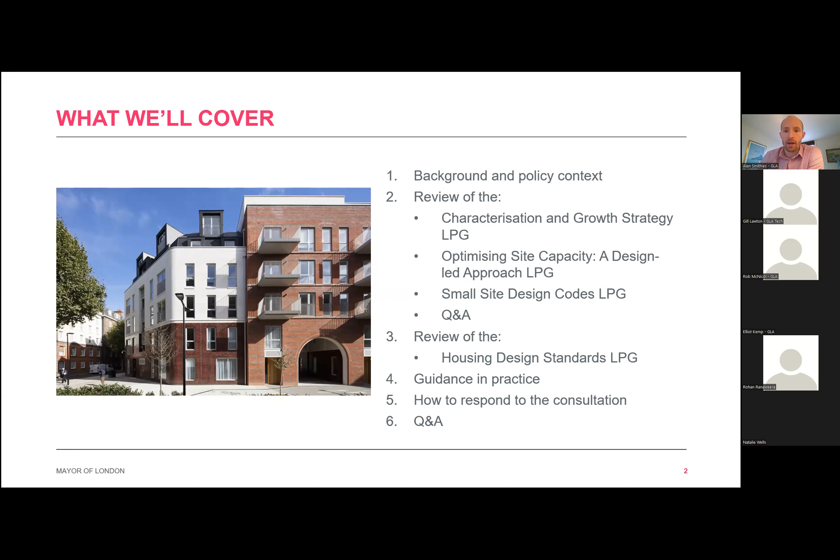A bit of background to the guidance we're consulting on. The first draft was called Good Quality Homes for All Londoners, released for information only in March 2020. Following this, the guidance was consulted on as London Plan guidance between the 13th of October 2020 and the 15th of January 2021, so for 13 weeks. The guidance consisted of 4 modules, shown at the top: module A, B, C, and D.

Since this public consultation, the guidance documents have been significantly revised. The changes are in response to the consultation feedback we got, but also to new national policy and guidance, such as the publication of the National Model Design Code and the changes to the NPPF, as well as responding to changes brought about by the COVID-19 pandemic. The previous draft guidance was also written in a style that doesn't reflect how our new guidance is done these days, because we've reconsidered how we do our London Plan guidance, and we want to make it as succinct as possible and much clearer. Hopefully that is the case.

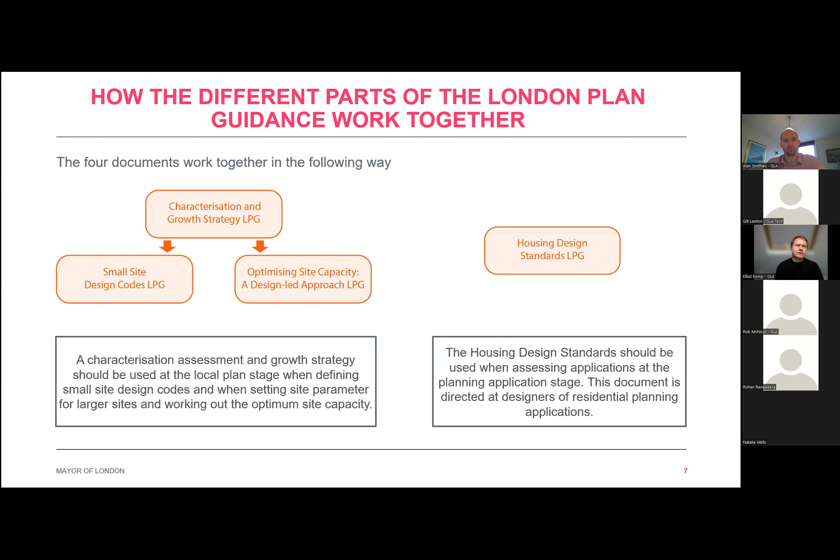The housing standards should be used when designing and assessing housing developments at the planning application stage. So it's not really aimed at the plan-making stage at all - that's quite different from the other 3 documents. This document is particularly aimed at designers of residential development. So Alan will now cover the first 3 documents.

Great, thank you so much, Elliot.

Okay, so on to Characterization and Growth Strategy LPG. Firstly, what is characterization and a growth strategy? This is the process of undertaking a characterization assessment or study and then devising a growth strategy for that area. This process should aim to identify what is special and unique about a particular area and form the basis of how the area might change over time. It's intended to be carried out, like Elliot said, by a borough or neighbourhood planning group, and is broken down into 3 stages, which I'll go on to in the next slides.

One important aspect to mention is that the approach taken in this process should be a digital approach to data collection and mapping. As a result, this should be much less about producing PDFs and much more about web-based maps wherever possible.

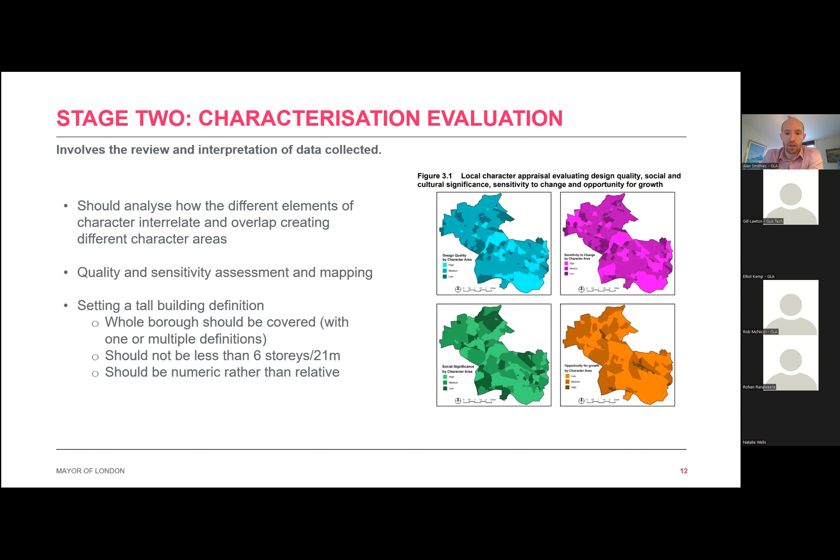The whole borough should be covered by one or multiple definitions, and this definition should also not be less than 6 stories or 21 meters to the top of the building, and should be numeric rather than a relative definition.

Stage 3 is where the borough or neighbourhood planning group should identify how and where the area will change over time. This involves a series of design, visioning, placemaking exercises to identify the following for each character area: first, areas suitable for different levels of change and growth.

The second is area-wide vision, policies, and potentially area-wide design codes for these different areas. And thirdly, locations where tall buildings may be an appropriate form of development.

Fundamental to this process is the involvement of and engagement with local communities. At this stage, it's a separate set of engagement than in stage 1, and should be focused on how and where to accommodate that change.

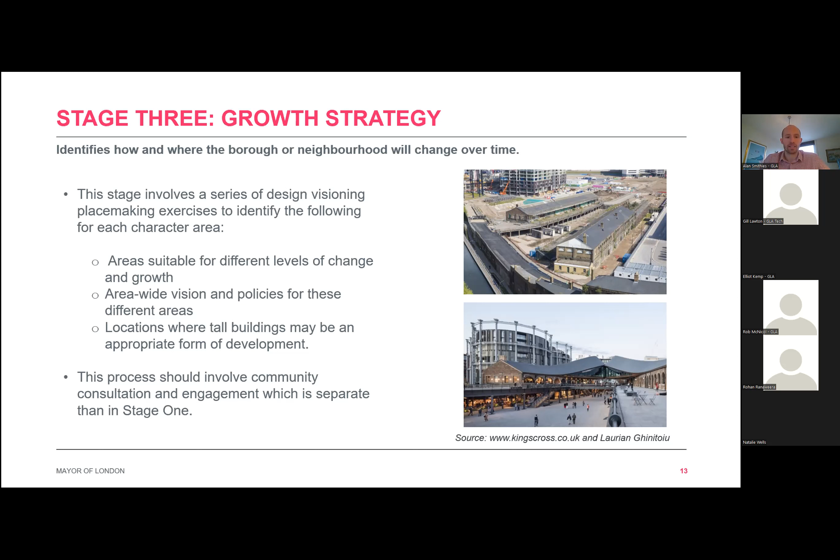In addition to that, their capacity for growth should be assessed. This capacity for growth relates to the opportunity for growth criteria I mentioned earlier, and is influenced by things like the connectivity, the built form of an area, among other aspects.

Important to mention at this stage is that this categorization is intended to be a tool rather than a designation.

Having identified an area's level of change and growth, an area-wide vision should be formulated, and a set of policies or parameters should be defined and determined for each of these character areas. These should set the broad parameters of how an area will change, and how its strategic

design intentions and aspirations - I've got a picture on the slide showing an area that's undergone substantial change, where you can see that the character's been significantly improved, just as an example there.

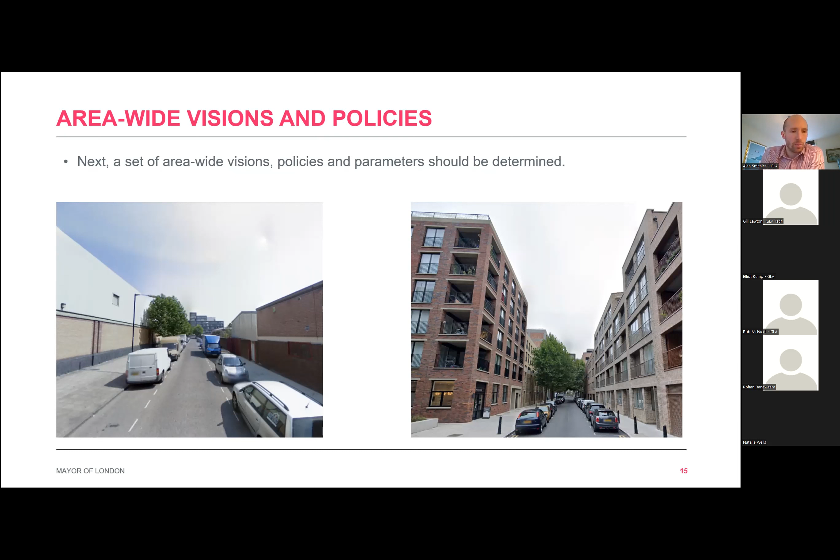I think in reality, much of this work is already being done or being commenced for different areas within a borough or neighborhood. However, we mention it in this guidance as an important part of a growth strategy.

The last bit I'm going to cover is the identification of locations where tall buildings may be an appropriate form of development. This should be a sieving exercise broken into 4 steps: a sensitivity assessment, alignment with area-wide vision, a suitability scoping exercise, and then lastly to define the maximum heights for areas where tall buildings may be appropriate.

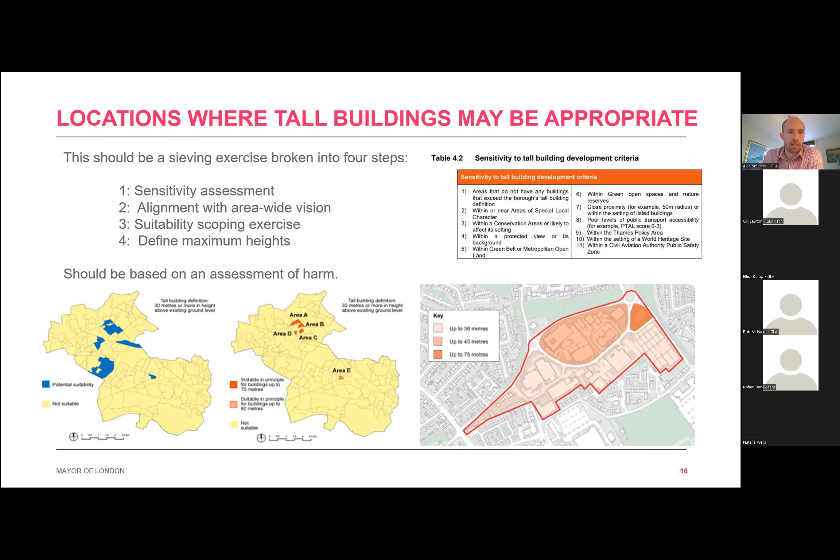I've shown a few images there on the screen about those processes. This process as a whole should be based on an assessment of harm, and local authorities are encouraged to set out the harm caused by tall buildings in locations where they are not appropriate.

So that is a quick run through of the characterization and growth strategies LPG. I'm next going to look and review the optimizing site capacity, a design-led approach, LPG.

The document sets out that development should optimize site capacity rather than maximize density. The process involves setting site-specific design parameters and codes to provide clarity over the future design of sites. These are high-level strategic parameters addressing the form, massing, and layout of a future development. By strategic, we mean the most important design considerations rather than detailed design aspects.

For residential sites, these parameters can then be used to determine a site's capacity using the indicative site capacity toolkit, which is part of the guidance. This toolkit allows users to model the massing of a development using 3D SketchUp models.

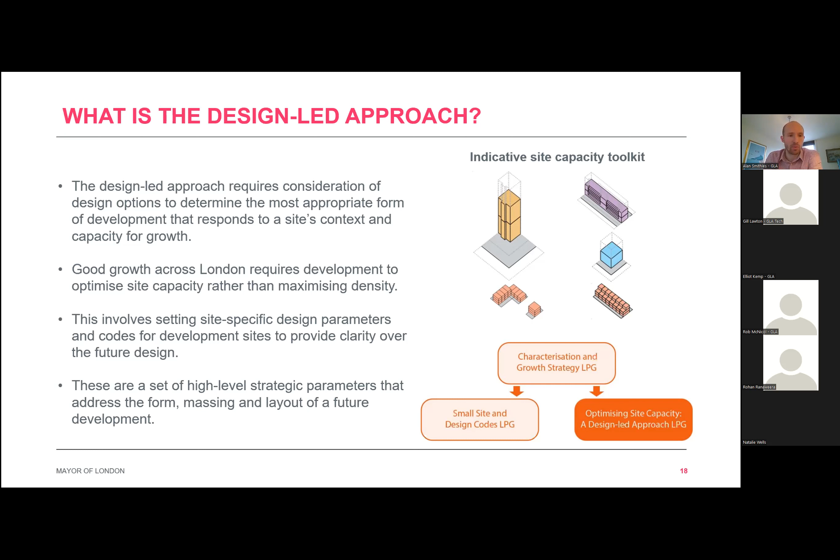Using the capacity calculator, which is an Excel spreadsheet, the indicative site capacity can be worked out. Whilst we use this indicative site capacity toolkit within this guidance, it's worth mentioning that alternative software and modeling can be used, providing it's robust.

At the local plan making stage, this guidance should be used when setting design parameters to establish the indicative site capacity for site allocations, SHLAA sites, and also any master plans that are being undertaken.

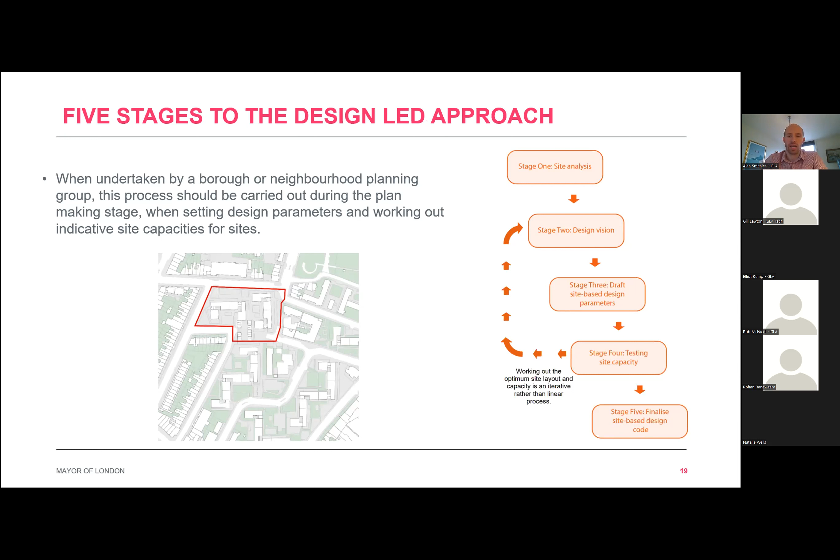It's important to mention the iterative nature of this process, where the design of a site might go through several iterations. I've included on the diagram there on the right-hand side that process, showing that it's iterative rather than linear.

Throughout this LPG, we've used an example site, which I've shown on the screen there on the left. I'll now go through each stage in a bit more detail, and I'll reference that site as we go through them.

Stage one is the detailed site analysis for the site in question. Some of this analysis will have been done as part of a borough or neighbourhood's character assessment, however this site analysis is likely to go into more depth. The LPG itself reviews what should be in this analysis, and I've shown just a few examples on the screen there, again using the example site to illustrate these elements.

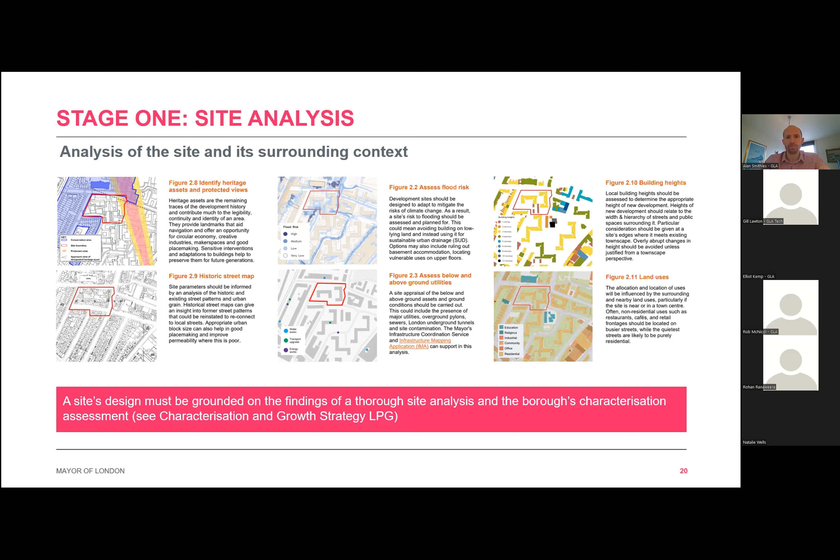Moving on to stage two, the next stage is the design vision stage. This is a placemaking exercise in which the local community should be collaborated and engaged with. A site's positioning within one of the three categories of change - conserve, enhance, transform - should then be taken into account.

Moving on, stage three is the drafting of a set of site-based design parameters. These should be concise, graphical, and simple to understand parameters that focus on the strategic design considerations, as I mentioned earlier. These parameters can be broken down into 6 categories, shown on the right-hand side of the screen there, which align with those in the National Model Design Code.

I've included some images on the screen there showing the example site again, where different routes and green infrastructure have been positioned on the site.

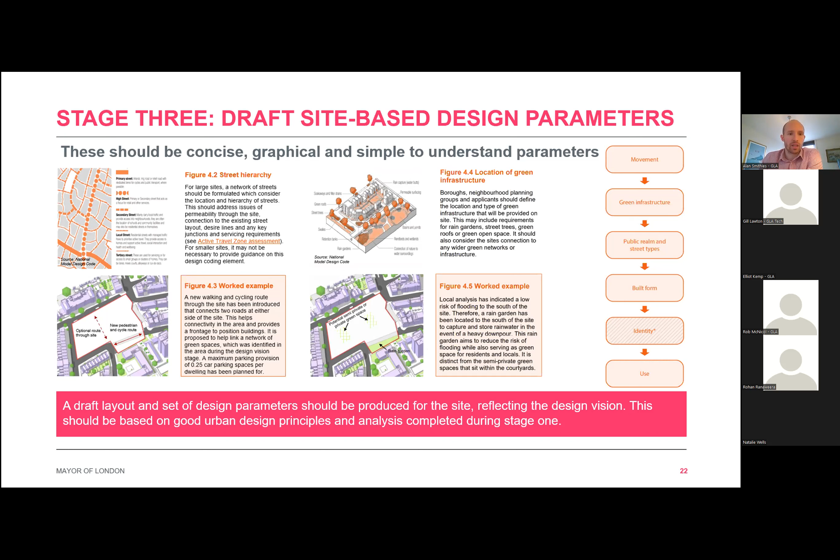Once the draft design parameters have been resolved, an indicative site capacity can be worked out for sites that are residential. As mentioned, this could be done using the indicative site capacity toolkit, which uses SketchUp, but it could also involve other software where necessary.

Once a design has been resolved using the design parameters in stage 3, the indicative site capacity should be based on these. It's worth mentioning that this is only intended to be an indicative capacity and should be treated as such.

It's also worth mentioning that the site capacity calculator just takes into account the dwelling size mix, the tenure type, and parking ratio. This allows the calculator to highlight things like the number of homes lost to car parking, which is hopefully a useful feature.

In terms of the iterative nature of the process that I've touched on earlier, this may be the stage where a designer feels it's worth changing or tweaking the design vision or draft parameters if the site could be designed in a better way. An example is whether there's adequate quantum of play space or green space.

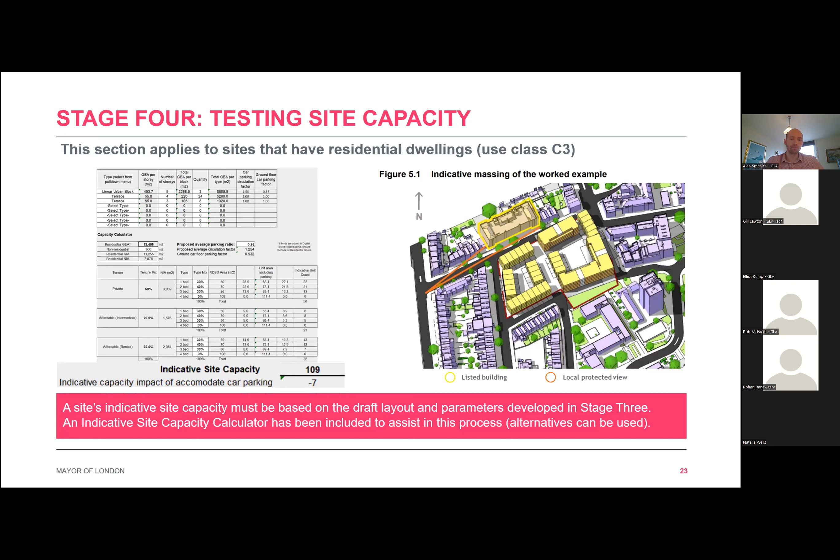So once a final site layout has been determined, the site-based design parameters should be finalized. When undertaken by a local authority, these should be detailed in local plan documents and part of the site allocation process. These essentially will become a site's high-level design code, which should be used to assess future planning applications.

I've shown an example of these finalized parameters for the example site on the left there, and I've also shown a web-based map of site allocations on the right, which is where it's preferable that this information is displayed and held.

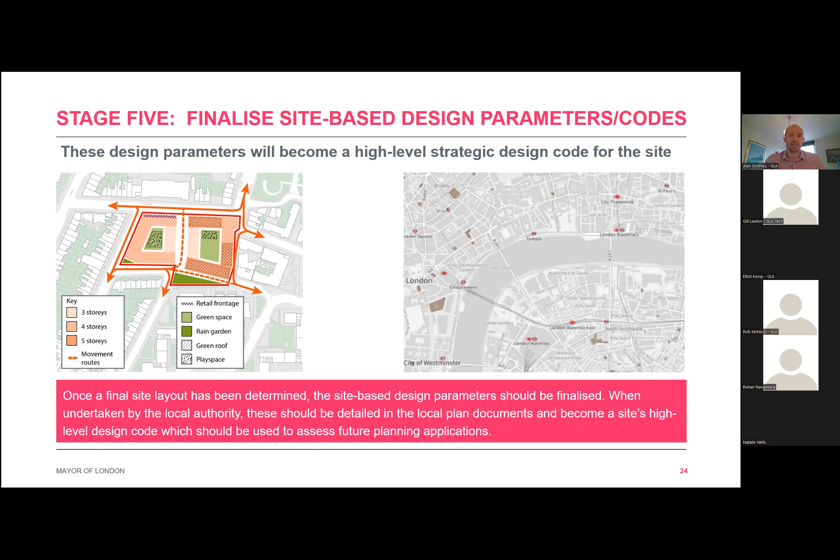Great, so that is just a whistle-stop tour or review of the Optimizing Site Capacity LPG. I'm now going to touch on the Small Site Design Codes LPG before we go into a Q&A.

So again, what are small site design codes? This process will feed off the Characterization and Growth Strategy LPG, and these are area-wide rather than site-specific design codes.

Much of this base analysis of these design codes will have been carried out as part of a character assessment or study, which I've touched on in the first LPG, in particular the character types I mentioned earlier. These character types will form the basis of an area-wide design code, and they've also been referred to as area types in the National Model Design Code.

It's worth mentioning that the documents I'm speaking about today do very much align with the processes in the National Model Design Code. And it's worth reiterating that the aim of these small site design codes is to proactively support well-designed new homes by providing clarity and certainty over the design of small sites.

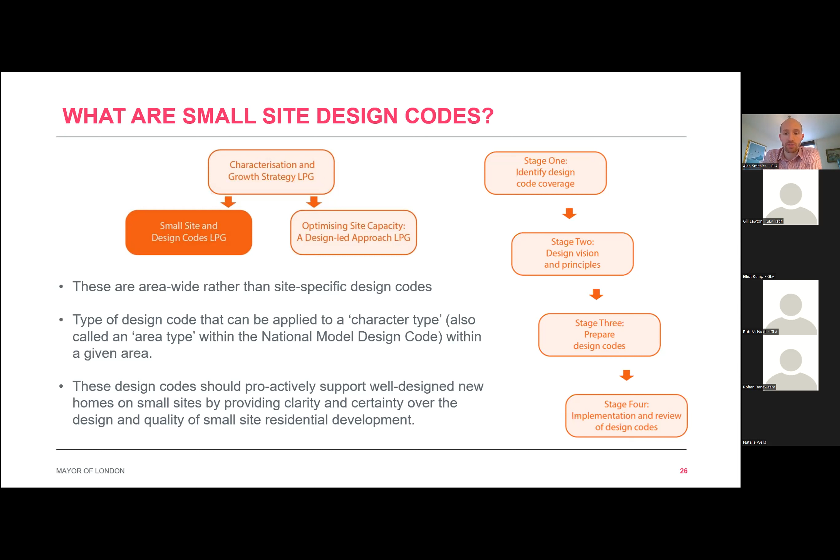The process of creating these small site design codes can be broken down into 4 stages, shown on the right-hand side, which I'll now review in turn.

First, stage 1 is the identification of the design code coverage. A borough or neighborhood's character types should be the basis of this. A planning authority may choose to do a design code for some of them, such as terrace or Metroland estate character types, for example.

The design codes for each of these character types should then provide guidance on some or all of the following conditions: street facing, high street conditions, backland conditions, or residential extensions. Again, it might provide some or all of the guidance on those conditions.

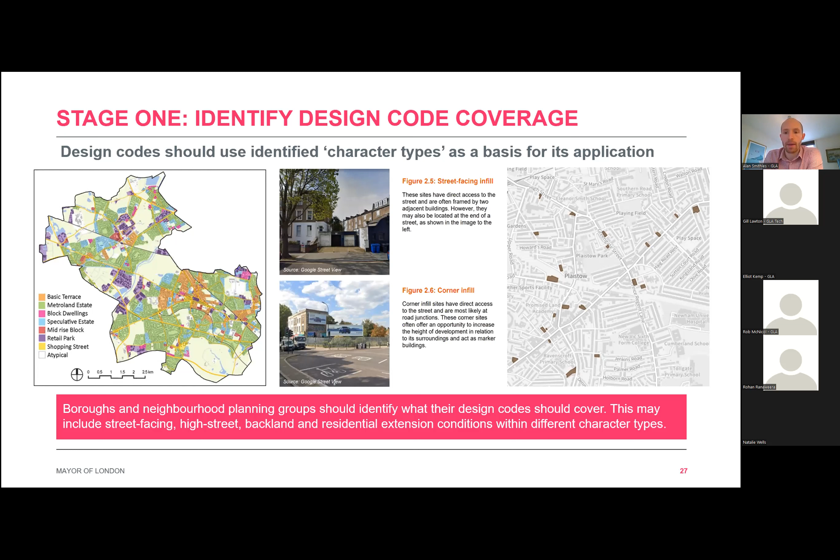Authorities are also encouraged to identify any small sites for development within their area. These are actual, specific sites, and they may include things like residential garages or surface car parks, for example. These should then be identified and shown on an authority's web-based brownfield register maps, like the one I've shown on the right-hand side there.

Stage 2 of this document is the design visioning stage. Here, a coding plan should be created, very similar to that detailed in the National Model Design Code, and I've shown an image on the screen. This should show where the design code applies and also any identified small sites, which is that process I've just mentioned.

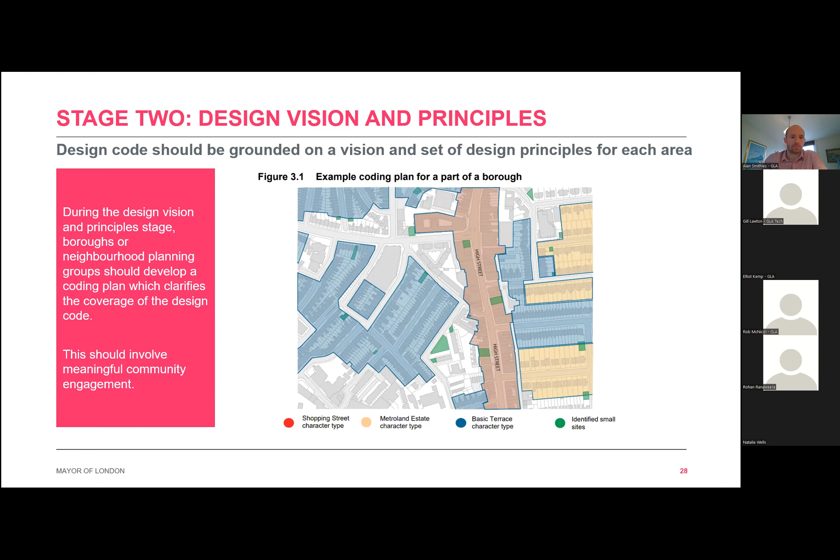Stage 3 is the preparation of the design code. Following the development of that coding plan, a set of design codes for each character type should be prepared. These should be rules-based and use graphical images to illustrate the key parameters, and I've shown a few examples on the screen there.

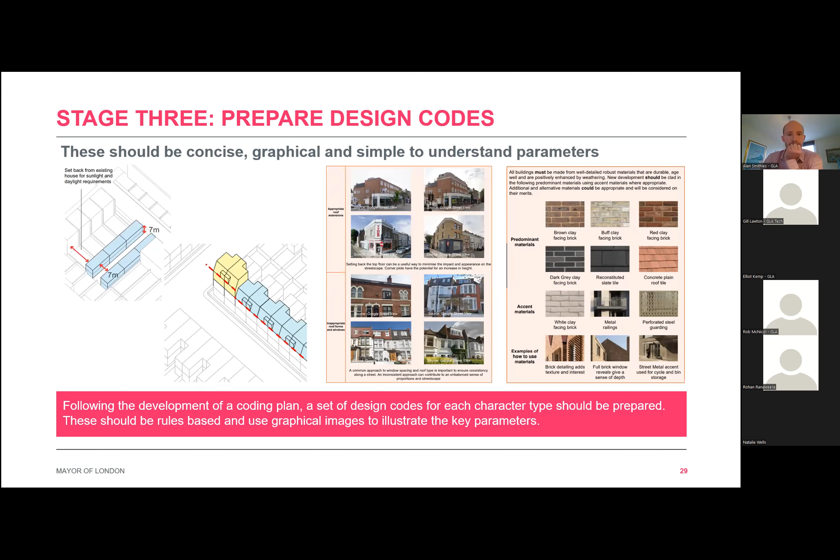Then we've got stage 4. Stage 4 is the implementation and review of design codes once they've been defined and set. Authorities should monitor compliance of these design codes and amend these where necessary.

There are several example design codes in the appendix of the document, and I've shown a couple of these on screen. I just want to give a shout out to the work that both Tower Hamlets and Haringey have already done on design guidance and coding for small sites, and those are the examples on the screen.

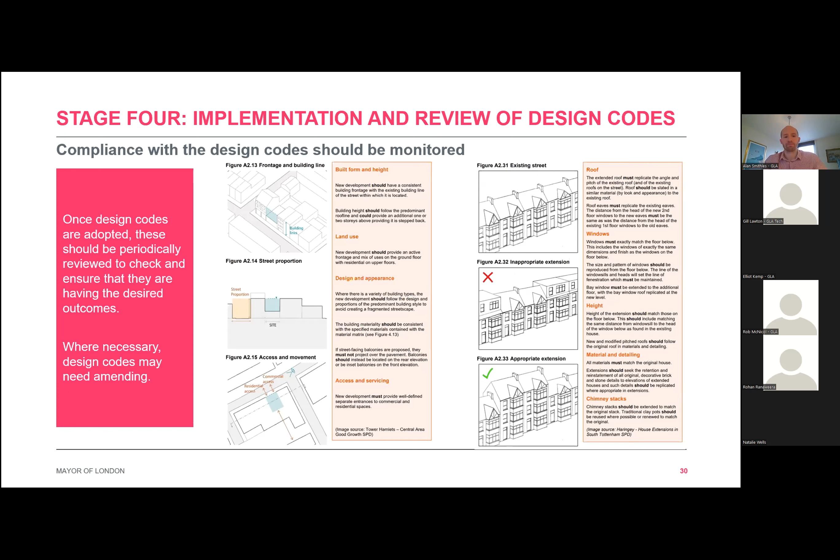Great, so that is a very whistle-stop tour of those 3 LPGs. I think we're going to move over to a Q&A. I'm going to pass over to Rohan now.

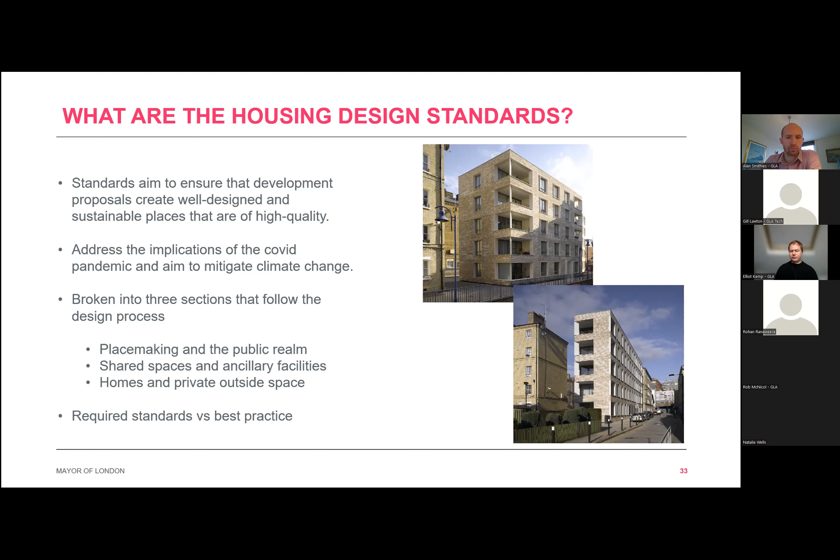The standards are split into those that are required and those that are strongly encouraged and represent best practice. This document also highlights particularly where standards don't apply to specialist older persons housing. Can you move to the next slide, Anne?

Thank you. The guidance is aimed at developers and design teams seeking planning permission, and borough development management officers when assessing applications. So it's not aimed at the local plan process at all. It's only for self-contained residential development, so that's use class C3. It's not applicable to other forms of housing, such as shared living, temporary accommodation, student accommodation, etc.

Each standard indicates in brackets whether it applies to a new build development, a change of use development, or conversion, or all forms of housing development, so that makes that clear. The standards express what it means to optimize site capacity for a residential development, as opposed to simply maximizing the development of the site.

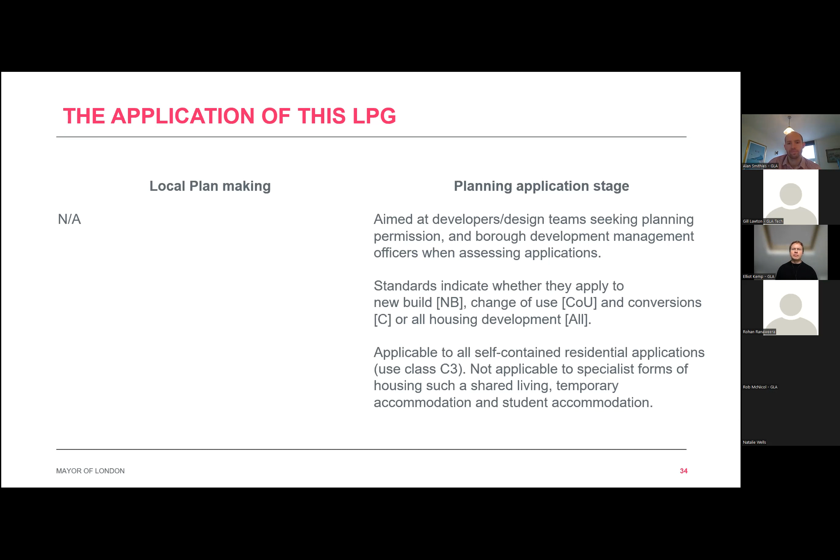Next slide, please. So part A, the first of the 3 sections, focuses on the wider area of the site, on placemaking and public realm. Good placemaking involves taking cues from the landscape, topography, the local climate, its heritage assets, and the pattern of building, streets and open spaces.

The layout of any development will be influenced by a wide range of factors, and the standards cover all the key design considerations that need to be taken into account. A number of the standards in this section address the relationship between building orientation and its massing and thermal efficiency of the building, and other implications for achieving net zero carbon.

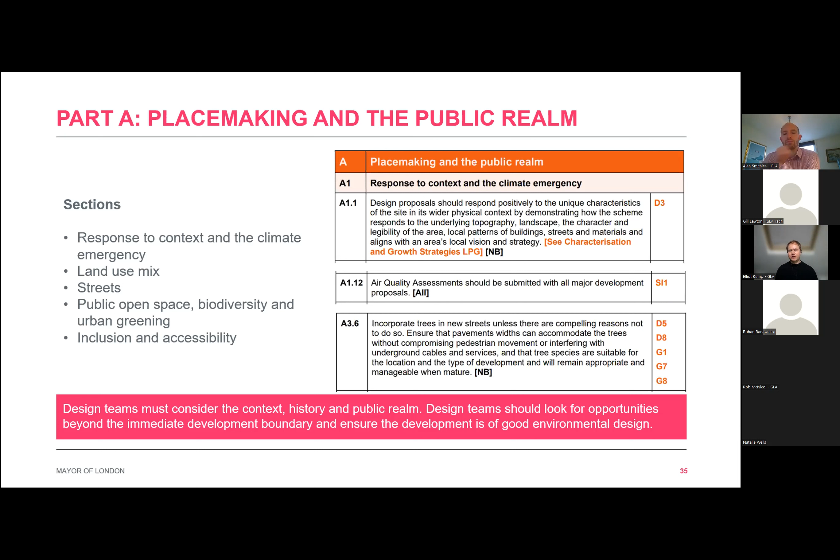Moving on to the next slide, please. So part B covers the shared and ancillary spaces, moving into a bit more detail, focused on the site. The majority of new homes over the plan period are going to be flats. Therefore, it's important that the shared indoor and outside space and ancillary facilities are well designed.

Careful design can ensure that these shared areas are pleasant, inclusive, sociable extensions of the home that help build supportive communities. So the standards address internal circulation, number of dwellings per core, and parking spaces for bikes and cars. It cross-links to other guidance such as the fire safety guidance where applicable, and it covers the design of outside amenity space, waste storage, and the long-term management and maintenance of the development.

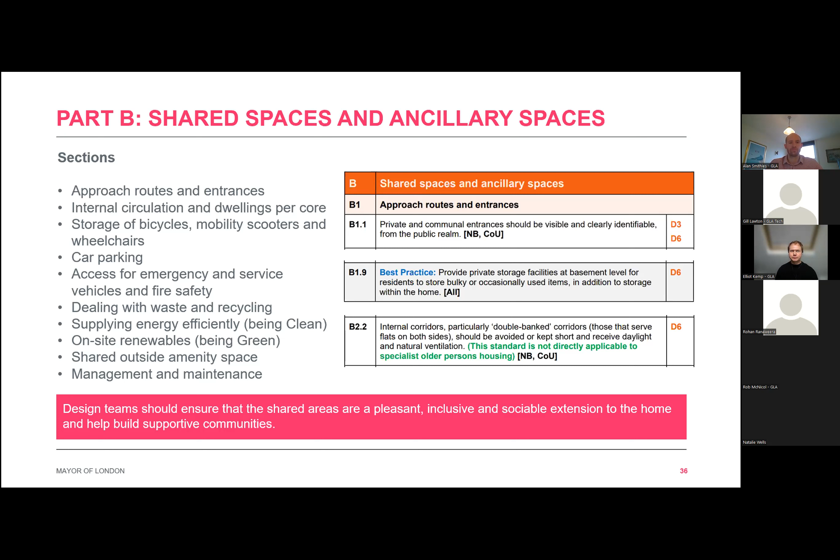Next slide, please. So part C covers the design, getting into the internal bits of the home, as well as private outside space. All homes are required to meet the London Plan space standards, which are exactly the same as the Nationally Described Space Standards. However, these are an absolute minimum and not a target, so the guidance encourages homes to exceed these standards by at least 5% to improve residential quality and accommodate the changes in working patterns and experiences as a result of the COVID pandemic.

The standards recommend more generous private space, again in response to issues highlighted by the pandemic. Homes should generally have at least 2 habitable rooms, each with a window, and homes are expected to be dual aspect unless there are compelling reasons why that cannot be achieved. In regard to daylight and sunlight, the standards aim to complement considerations of daylight and sunlight impacts using the BRE guidance, Site Layout Planning for Daylight and Sunlight. This section also covers the design of outside space, making sure it's functional and well designed.

So that's a canter through what this document covers. I'm going to pass over to Alan for the final few slides.